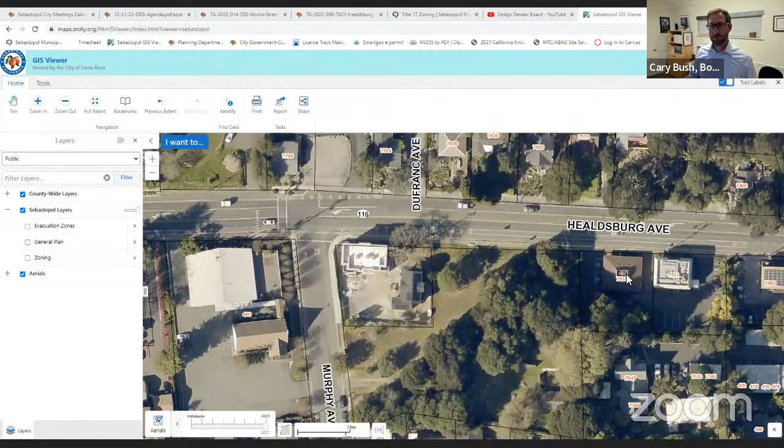Yeah, or this one here. Correct. Correct to which one? Sorry, your cursor's right on it. Yeah, so this was part of the project. It's a mixed use development, so the commercial aspect is up front here, and then there is a single family residence on this back part of the lot. Okay. Perfect. Thanks, that helps.

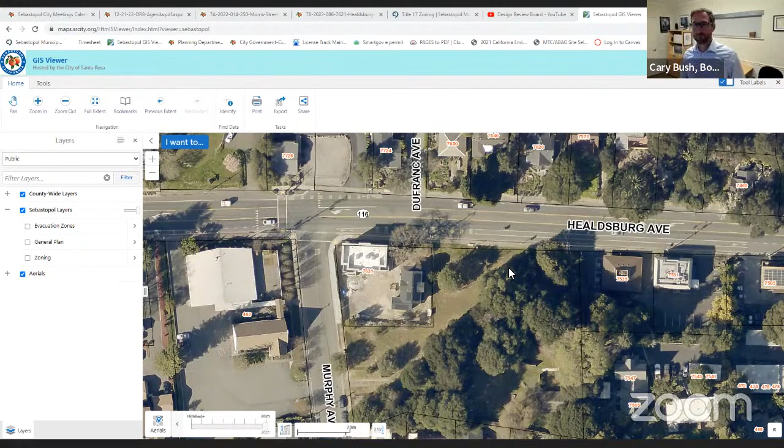All right, any other staff questions? All right, seeing none, why don't we turn it over to our applicant. Kathy, do you have a presentation for us?

I do. And John, am I allowed to share my screen for the PowerPoint? Okay, let me, if you don't mind, I'll go ahead and get that up and then I'll do introductions. Sounds great.

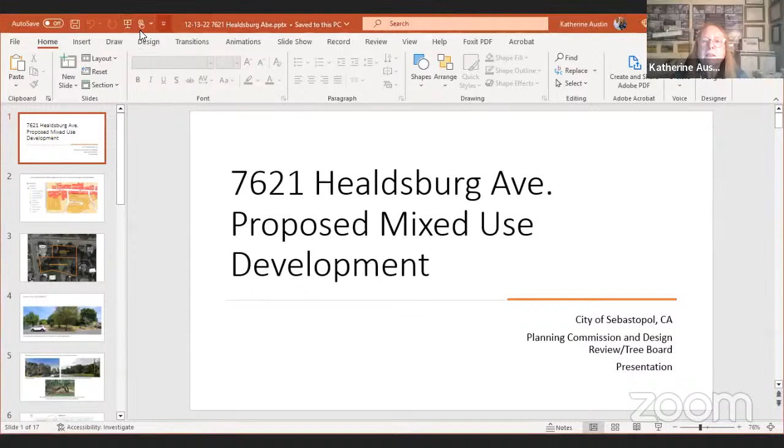Okay good, well it's nice to see some familiar faces. I apologize, my voice isn't quite right. I had laryngitis last week, which is why I had to postpone our hearing. I could only whisper, so if I need to sneeze during this presentation, please forgive me. I have that RSV thing that's going around.

It's nasty. So with me here today is our civil engineer Paul Peck, our landscape architect Sandy Reed, and John Meserve, our arborist. I'm afraid our owner had a family emergency and wasn't able to be with us here. He will be here for the planning commission meeting, but I'll be taking notes, and of course this is recorded, and he plans to watch it after. So my apologies that he wasn't able to be here with us.

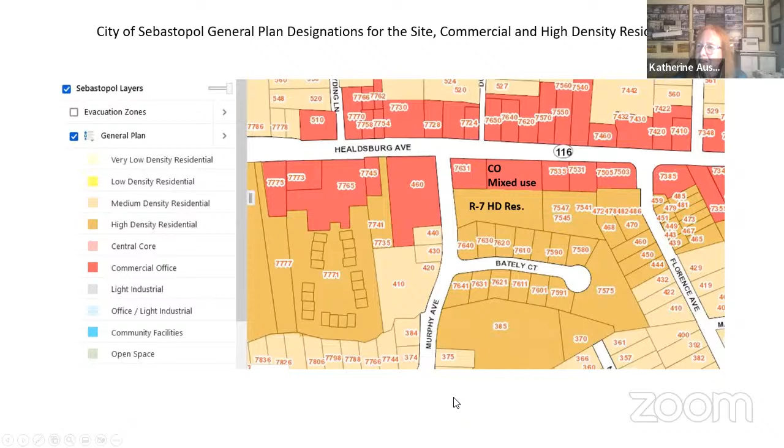Let me minimize something here so I can see this. This is the split zoning that you see here, the commercial in the front and the residential in the back. The Bately Court homes are back here, and so it made it an interesting challenge to meet both zoning requirements.

This is similar to what you just saw. This is the project beside us. This is the part that is mixed use, and this is the part that's designated high density residential. We have a very odd rear property line here, and I'll point that out a little bit. Some of these trees appear to be on our property, but they're actually on the Bately Court property, but we're proposing to save as many trees as possible in this area.

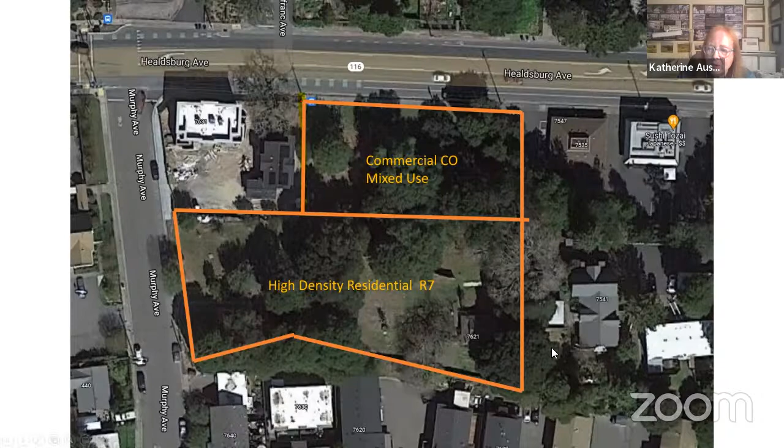As you can see, it's a very heavily wooded site. It's also a very steep site, and that is what makes this a very challenging site.

My partner Mark here is standing at the driveway that goes into the existing residence right now. And these are the views from the east and the west. This tree right here is one that we are proposing to remove because it's nearly collapsed.

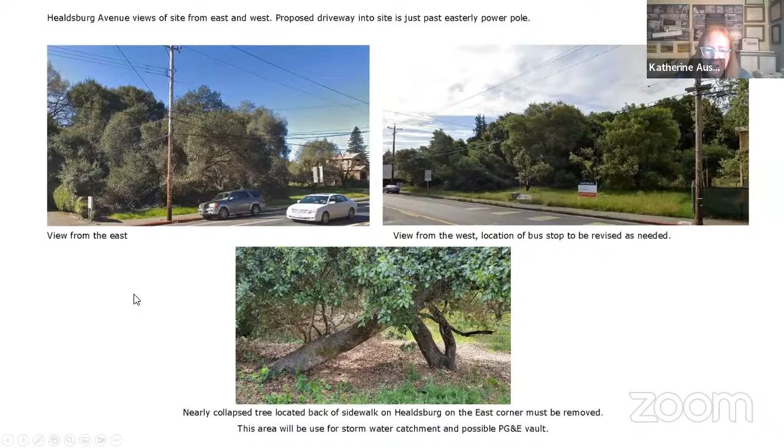But obviously it's a very wooded site, and we understand that. So in your staff report, I had done all of my drawings flipped because I was looking from Healdsburg Avenue up, but our civil engineer, as always, has the arrow pointing north. So I've rotated my drawings to match his, and I apologize if there's any confusion.

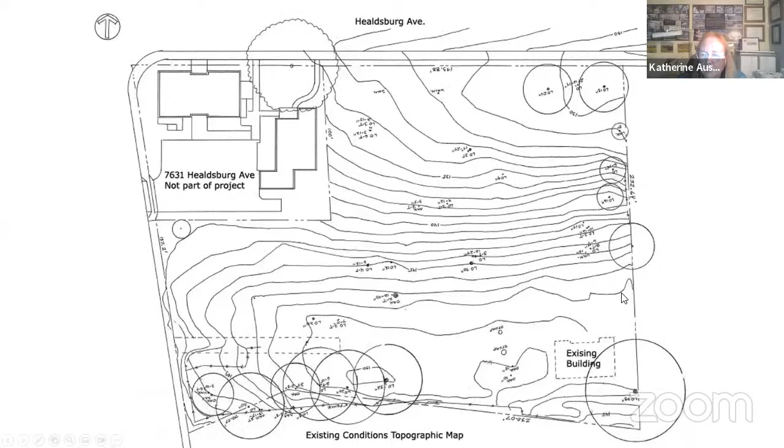This was what I went into the city staff with for preliminary review. And the reason I'm showing you this is these are 1 foot contours, so you can see it's an extremely steep slope right through here. This is the existing driveway and the existing building. This part of the site is more level, and this part relatively is more level, so we are proposing our buildings to be on the more level portion of the site.

You can see that we're proposing some townhomes here, and then the mixed use building here. Now originally I felt it made sense to have a driveway go all the way through. I'm going to let Paul talk at length about why this was so difficult. We worked together closely for over a week trying to make this pass-through driveway work. It wound up being extremely challenging with very high retaining walls, a lot more off-hauling of soil, impacting more trees, depressing this road, which impacted the back here and so forth. So he's going to go into that, but this is what I've shown your staff initially.

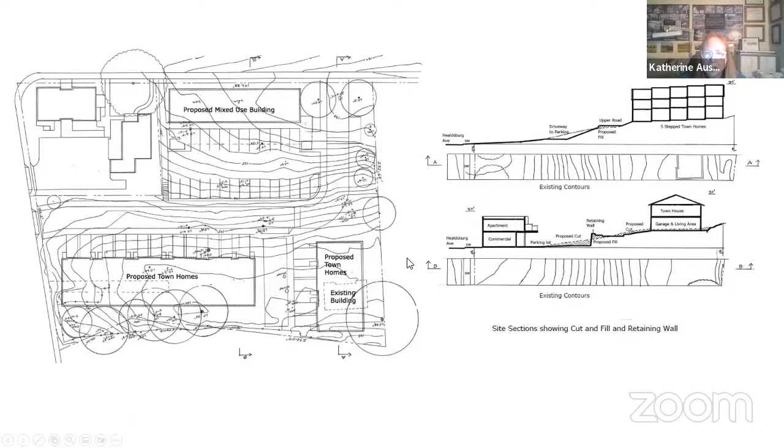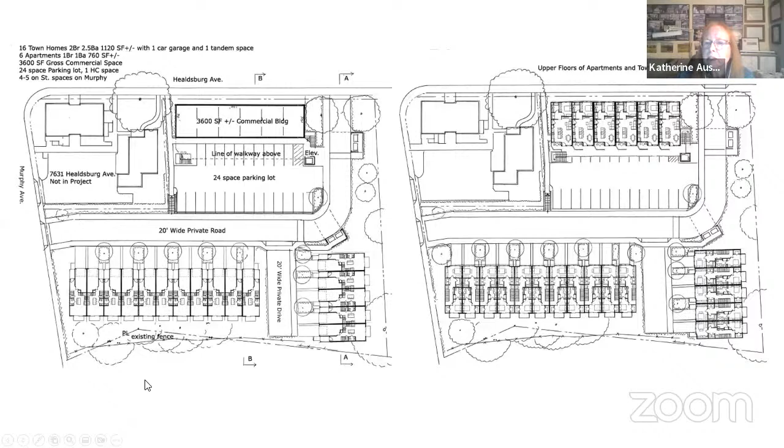We've had to remove 1 townhome. Originally, this was 16 townhomes. This width across the southern back part just couldn't work. We needed more room for stormwater mitigation, and setbacks just didn't work. So we did remove 1 unit from what we previously met with.

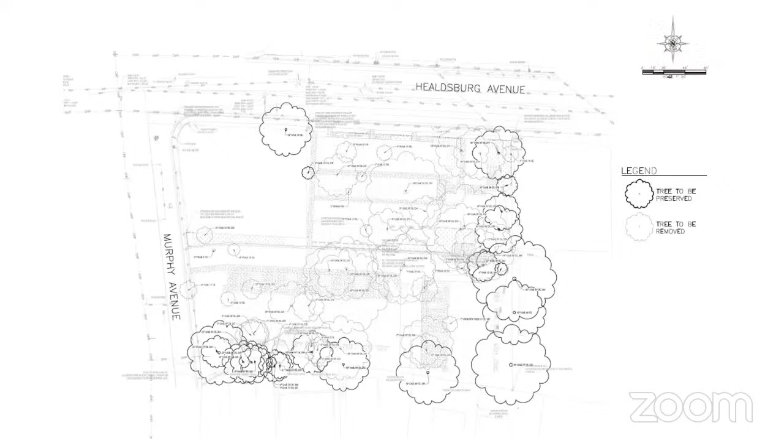I'm going to turn this over to Paul. This is one of his drawings, but it shows in the darker lines the trees we're proposing to save versus the ones that we're going to remove. And he's going to talk a bit about the grading, and then I'll have a map from the tree report. And then I'll also come back to the architecture to discuss, and then we'll open it up for your questions and comments, if Chair, if that's okay with you.

That sounds good. Okay, Paul, you want to take it over from here, just tell me next and I'll change the slide. And you may be muted. Is it possible for me to share my screen? Just give me a minute. How do I do that? I'll stop share, correct, John? Yeah, let me make Paul... Okay. Paul, you should be good to go. Okay.

Okay, so these are actually the emails that we sent back and forth between Kathy and I, trying to make this drive aisle work. Because of that 10 to 12 foot differential between the lower portion and the upper portion, almost all of that elevation had to be made up along this short edge after we got past the driveway.

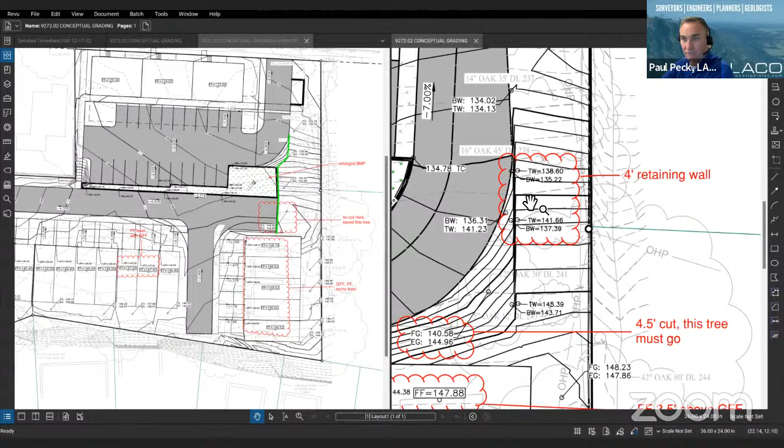What it caused was this tree right here - we were cutting about 4.5 feet at the trunk of the tree. This is a 12-inch oak. Also that was including a 4-foot retaining wall along here where we'd be in the drip line of these two trees, cutting 4 foot, still within the drip line of the trees.

In addition, because we couldn't get all the way as high as we wanted to, these 4 buildings here would require 7 stairs just to get to the bottom floor. In order to not have to eliminate all these, we really wanted to keep these trees and stay out of, keep any cut out of the root zone of these trees along this edge here.

Same thing here. We were trying to save all these trees on the backside, and we had these two - had to be, again, 4 steps to get into the bottom floor in order to keep that bottom floor deck from cutting into the root zone of these trees.

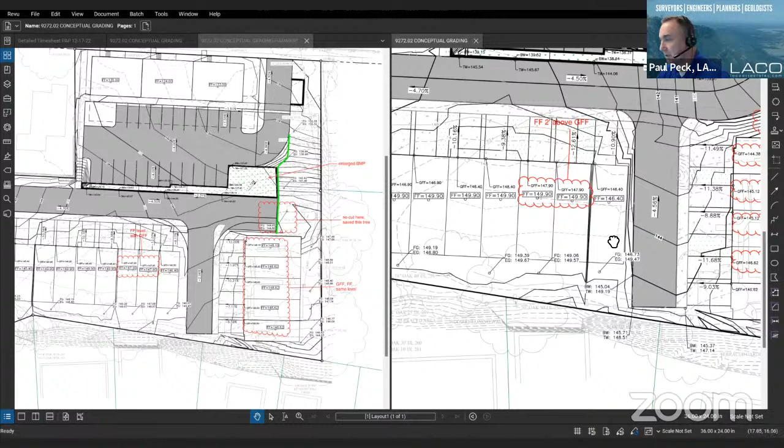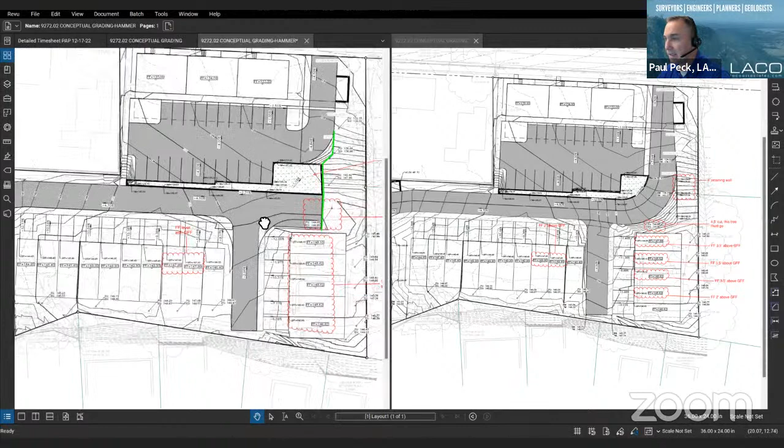In addition, we had about a 7,000 cubic yard export on this design here. So when we looked at this, we talked to the fire marshal, we ran this by the fire marshal. He is okay with this hammerhead as far as emergency access, so that's not an issue at all. Emergency access for these buildings will be handled from Healdsburg.

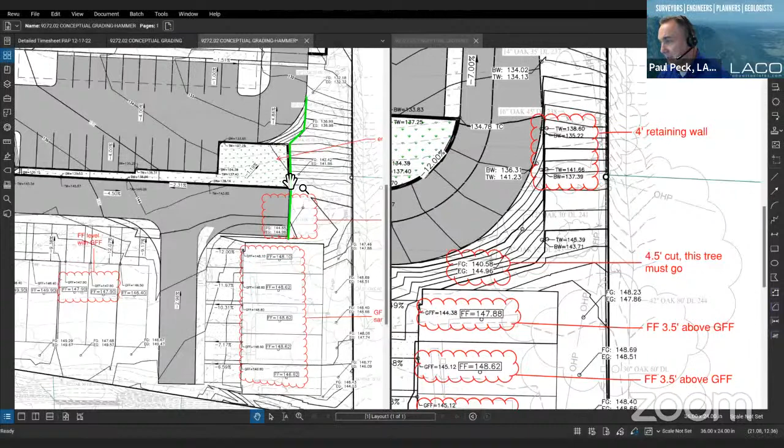So we ended up with this - again, if we look at this tree where we previously had 4 foot of cut, we now have no cut at all. Essentially, we're right at the existing grade. These trees that we were cutting 4 foot within the drip line, the root zone, now we're having very minimal grading at all. So these trees that we were, again, still trying to save, but was questionable, are being saved.

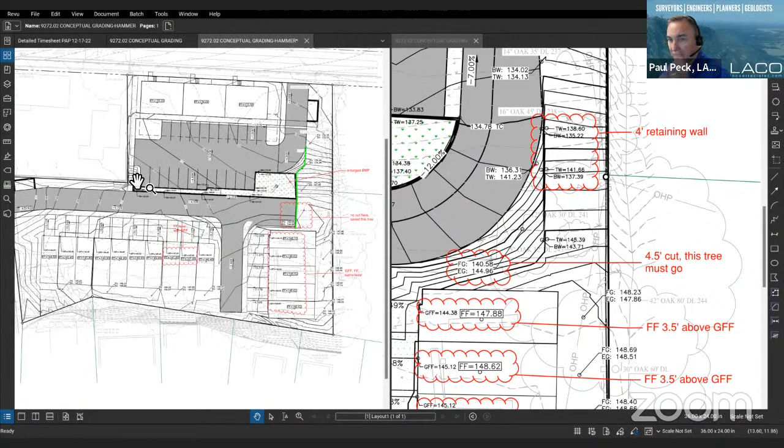All these houses all have level driveways into the driveway, and the walkway into the bottom floor are level, still allowing us to not get into the root zone of these trees here. And these two that previously had a 2 foot step are now level as well. In addition, we now still have about 1,000 yards of export with this design, but again, it's like 6,000 yards better than it was.

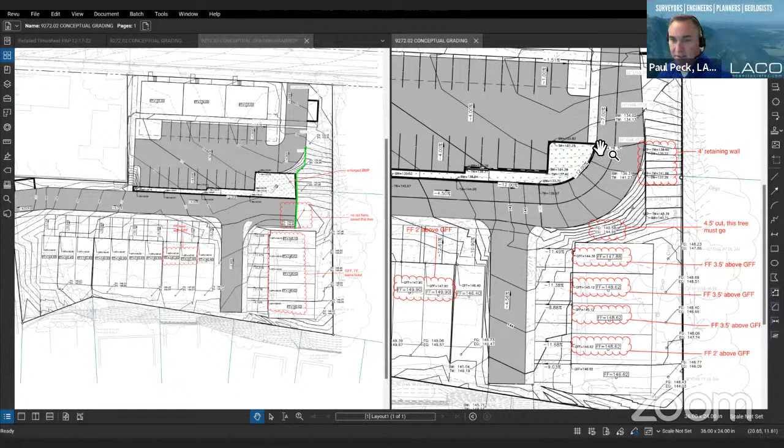Is there anything else I wanted to talk about? I think that's mainly it. This access was going to be 12% on the inside for a significant distance. It was going to be a very difficult road to both drive on and to walk on. So, I think that's all I have. Is there anything I missed, Paul, Kathy?

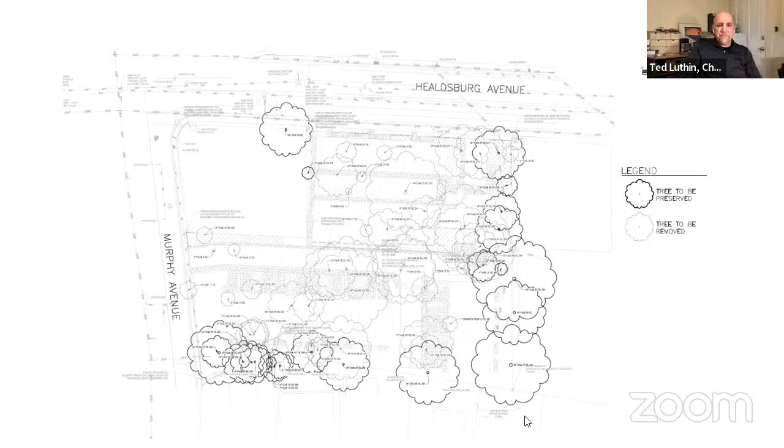When we go back to my slides, Paul, I want to talk about permeable paving versus impervious paving. So if I can share the screen again. Sure, I will, we'll go back to that. See if I can figure out how to stop. I think it's the share button, the red thing up there. Yeah, yeah, okay, I hope that was clear. Anybody have any questions about that? I think there may be a lot of questions, Paul. Why don't we go through it? Chair Luthin, is it all right if we go through our presentation and then have questions? Yeah, I think that's fine. Okay, all right, thanks, so let me go to the next.

We've also brought on Sandy Reed as our landscape architect since I originally put in our package, and she is working on some larger trees to help recapture some of the tree canopy on the site. We'll give her an opportunity to answer any of your questions about that as well.

But we recognize that we're taking out a lot of trees and we're going to have to do quite a bit of mitigation, and we're going to try to put as much on site as possible. We've also been discussing with Sandy, and Paul is going to work with city staff on what we can propose as permeable versus what has to be impermeable paving.

In my report, I've suggested that we make all of our driveways permeable concrete. It may be better to actually have the drive aisle be permeable and have the individual driveways solid, but this is something we're working on. We want to find out what is the best approach.

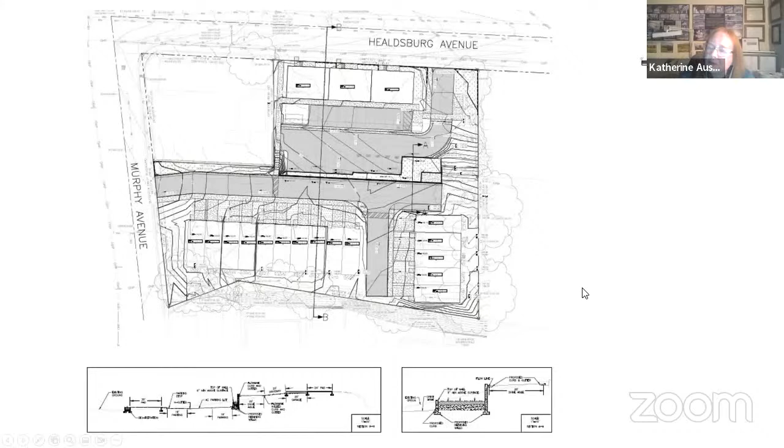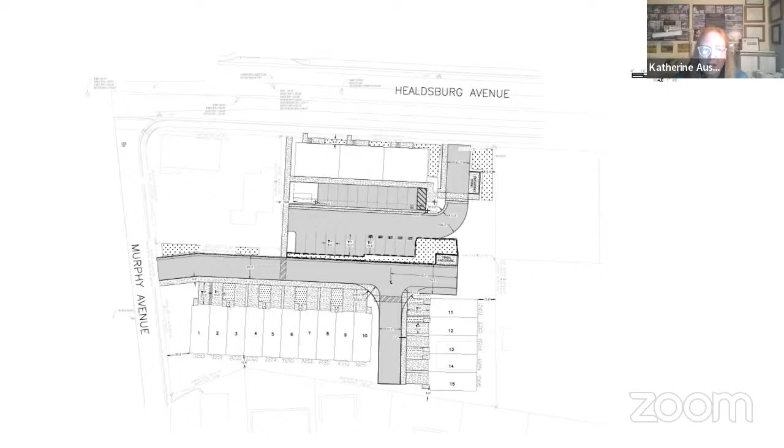I just wanted to mention, this slide in particular shows the paving a little bit more. These hatching lines with little dots are the stormwater mitigation areas. They're also between driveways in the townhome area and along here, but there's a lot of opportunity for planting in those areas as well. So when we come back with our formal submittal, we'll have a more developed landscape plan, but also another plan for how we're dealing with permeability of the paving.

Some of the trees clearly are not in great shape that we're removing. Some are questionable, but a lot of them are in good health, and we will have to mitigate for all of this. This one I'm hoping to save because we're no longer having a sidewalk here, and it has survived the creation of the retaining wall here, so I'm hoping we can actually save this one right over here.

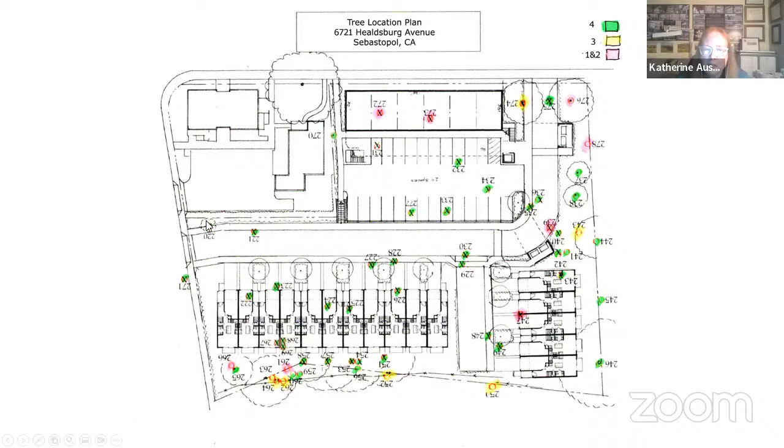It's possible that because of some of the shading of trees, we might have to move some solar onto the roof areas. We'll work with Sol Data to analyze the best approach and how much solar is required. My attempt here is to show that we're trying to basically hide them where we can. The other issue is that all of these are facing north, whereas if it's flat, they can be angled to be more towards the south and catch more sun.

Same thing on the commercial building. We have a lot of area to work with in terms of the mechanical area and the solar, but it'll all be out of sight for people on the ground.

These areas where I had previously said we could have ground covers and native grasses, we're hoping that we can do more than that. We can have larger trees and so forth, and we're going to work with Sandy on that. This is just the straight elevation.

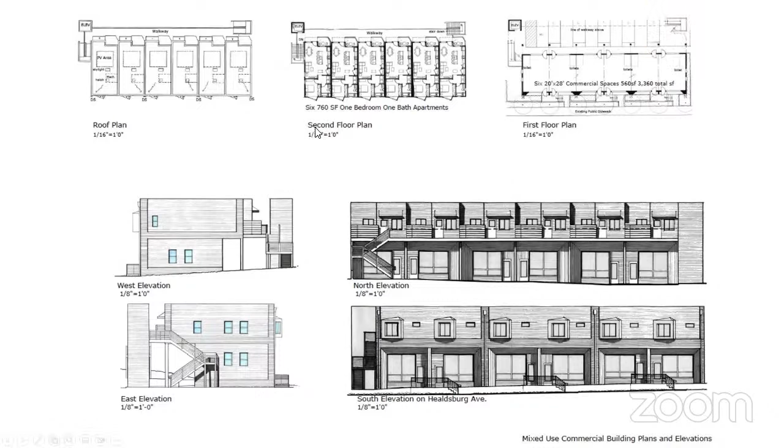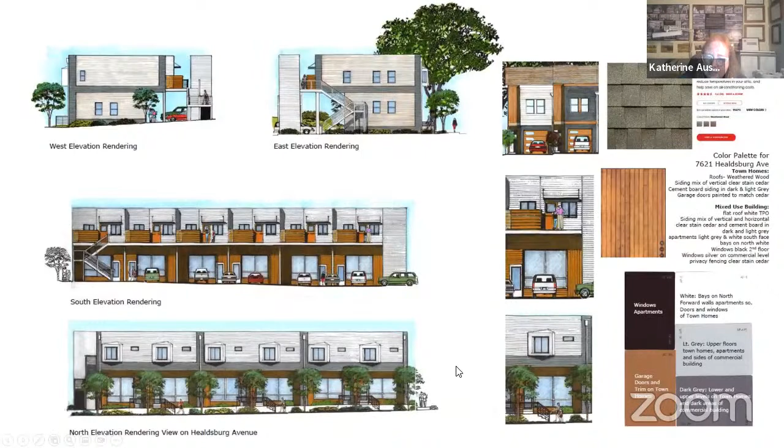Everyone has some semi-private area for each apartment above. It would become more of a challenge providing private area to residences on the lower level, and that's something I'd have to look at and work with staff on if we go that route.

These are the townhomes. You can see on the roof area here that I have a flat area for the PV and the mechanical. Each bedroom, similar to what I did with the Barlow Crossing townhomes, has its own bathroom so that you could have two unrelated people living together or an adult child with a parent. It adds more flexibility than just having one bathroom and two bedrooms on the second floor.

You can see though that it's very constrained on the first floor. It would be really impossible to make them purely accessible with a bathroom and bedroom on the first floor, which is why we're proposing all the accessible units to be on the Healdsburg Avenue side.

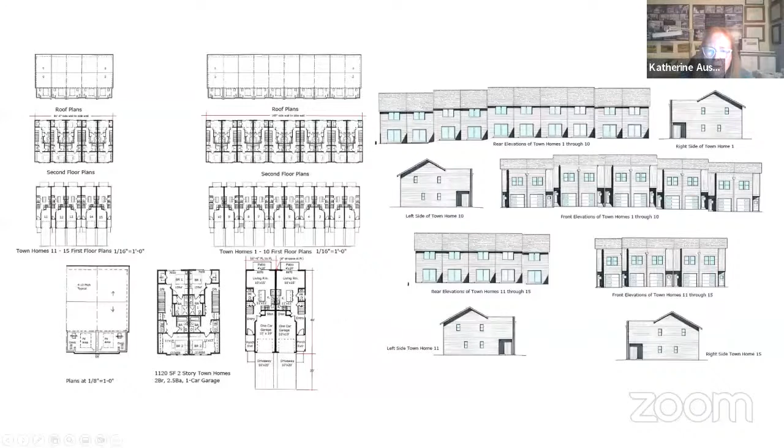This is my last slide. It's an elevation using the same materials as the front, but varying them somewhat to break up the facade. The buildings step down the hill, following the hill. We make up the difference in the stairs up to the unit. The garages are lower down where we're trying to maintain the root zone of the trees behind, but the road can't go up high enough. So the intention is to save all of the trees that we can.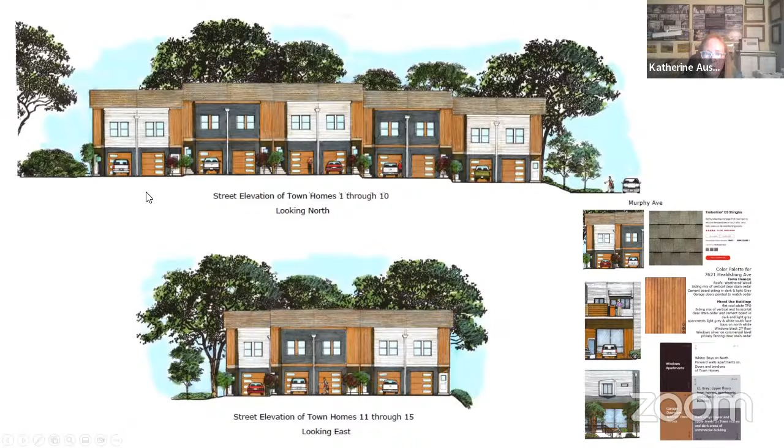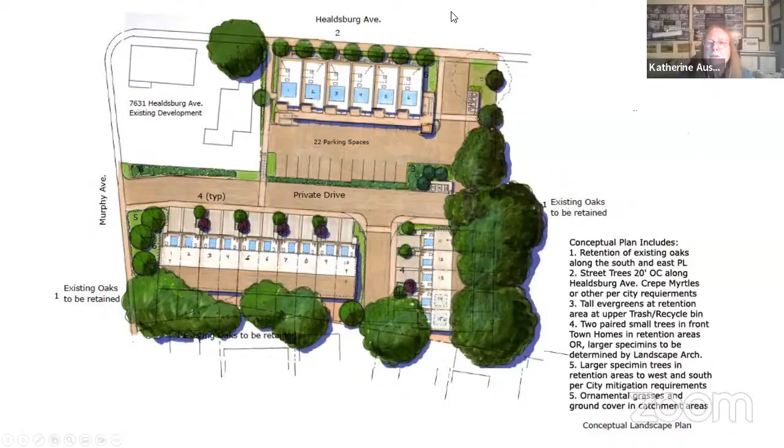That concludes my presentation, and I would like to ask if John Meserve or Sandy Reed had anything to add before we go into the question area? John, it looks like you might have something.

You know, I don't. You guys have all seen the report I generated. It's pretty typical—we've been on site, documented all the trees, tagged everything, numbered it, and mapped it, and you have all that information. So I think the site plan speaks for itself in terms of trees, and I'm here and happy to answer any questions you might have.

And Sandy, I just wanted to offer to you if you wanted to say anything or just be available to answer questions.

Was that directed to me? I couldn't quite hear. Oh, I'm sorry, Sandy. I was just asking if you had anything you wanted to add, or if you just wanted to be able to answer questions as they came up.

I think you mentioned really trying to put in some large specimen trees on the project. That was my first thought, as I haven't had a chance to look at the project carefully yet, so that's all I can say right now. I think, like you said, we might have to work on permeability or the materials.

Sandy just joined us in the last week, so she hasn't had a chance to go over the project in depth yet. Sandy and I worked together on the Barlow and had a great time on that. I know you're all familiar with her work in Sebastopol, and I think she's going to be a great addition to the team. Thank you about that, by the way.